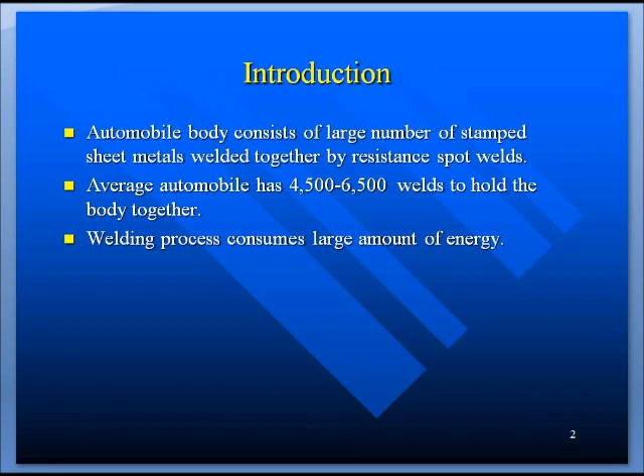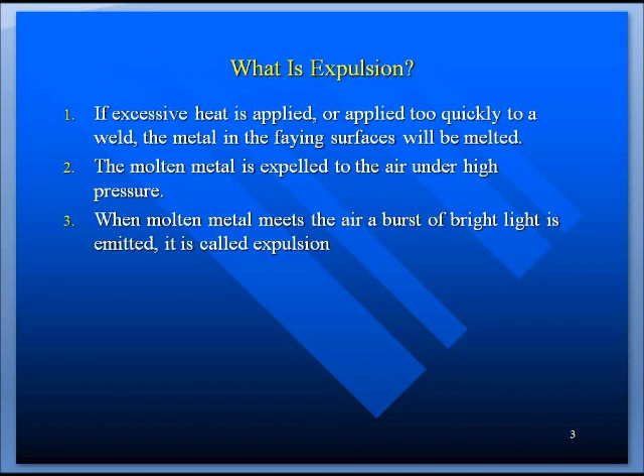What is expulsion? If excessive heat is applied or applied too quickly to a weld, the metal in the faying surfaces will be melted. The molten metal is expelled to the air under high pressure. When molten metal meets the air, a burst of bright light is emitted. It is called expulsion.

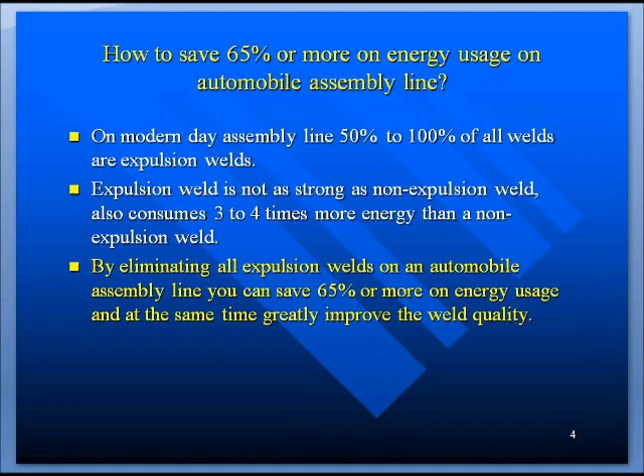On a modern day assembly line, 50% to 100% of all welds are expulsion welds. Expulsion welds are not as strong as non-expulsion welds, and also consume 3 to 4 times more energy than a non-expulsion weld. By eliminating all expulsion welds on the automobile assembly line, you can easily save 65% or more on energy usage, and at the same time greatly improve weld quality.

Fact or fiction? No spark, no weld. A stuck weld or missing weld does not produce expulsion. A good weld also does not produce expulsion.

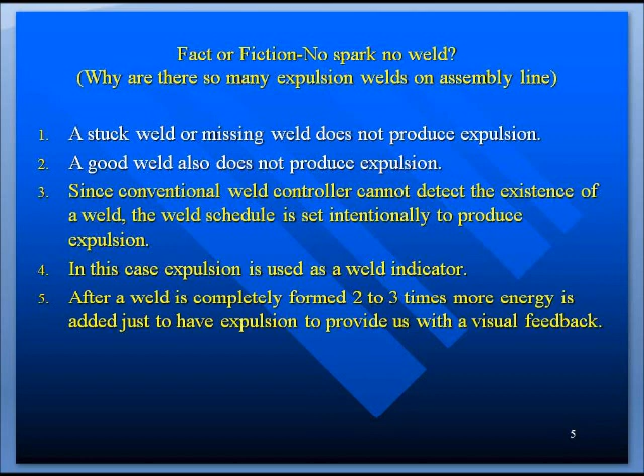Since a conventional weld controller cannot detect the existence of a weld, the weld schedule is set intentionally to produce expulsion. In this case, expulsion is used as a weld indicator. After a weld is completely formed, 2 to 3 times more energy is added just to have expulsion to provide us with visual feedback.

This is a Camry hybrid plant in Melbourne, Australia.

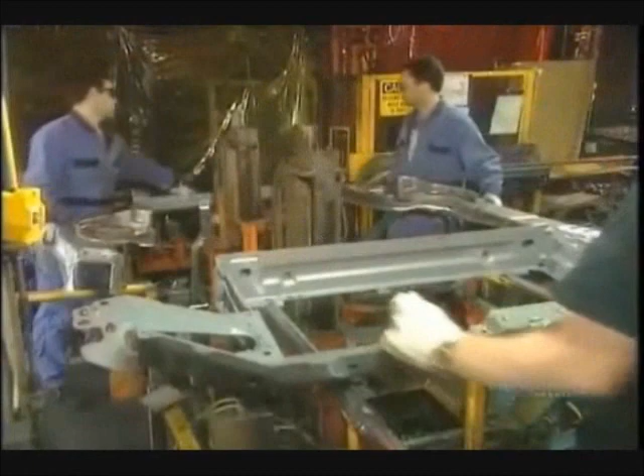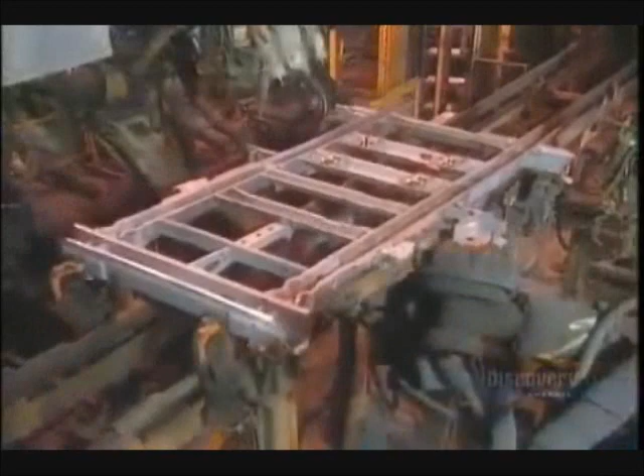This is a minivan plant in the U.S. Structure of the van: it's made up of the radiator support, two side rails, and clips on the front of those side rails for the bumper structure. Then they put this front structure onto the automated production line. Meanwhile, robots weld what's known as the ladder assembly. It's the backbone that supports the floor and sides of the van, and it contains, among other things, the pockets that will hold the seats.

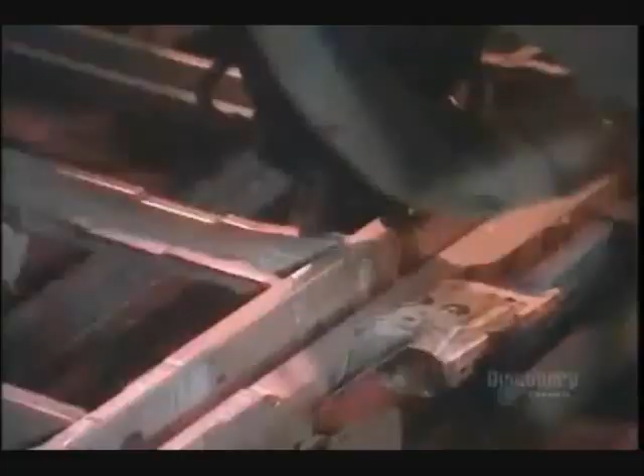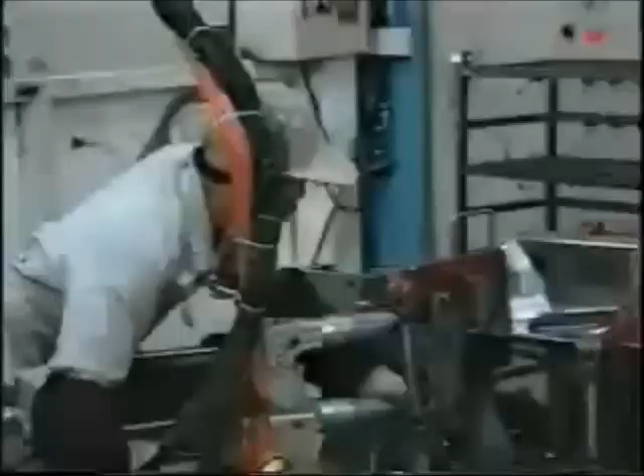This is a manual assembly line in Asia.

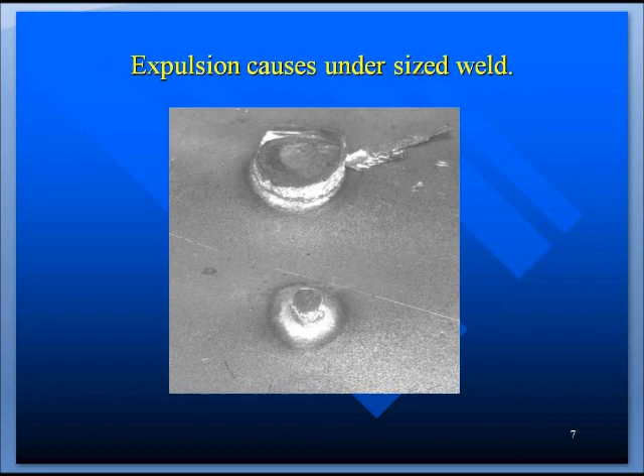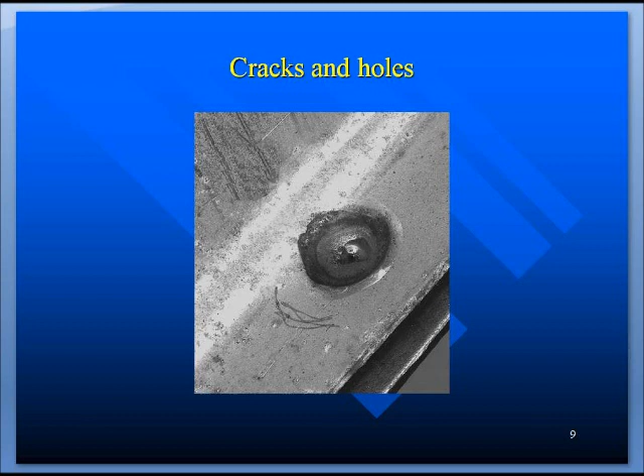Severe expulsion can cause porosity and void, undersized weld, expulsion burns through weld, cracks and holes, excessive indentation, and non-round weld.

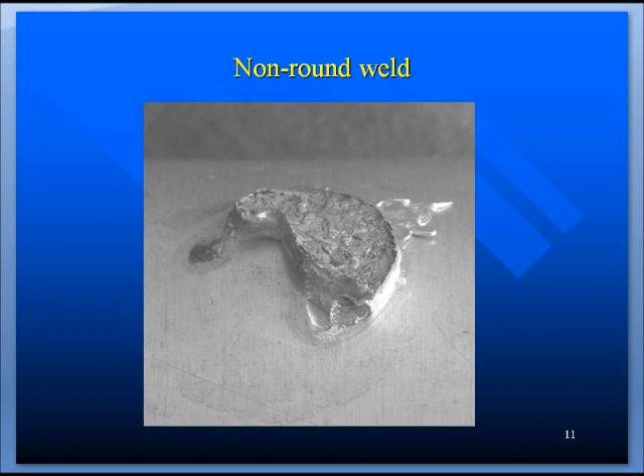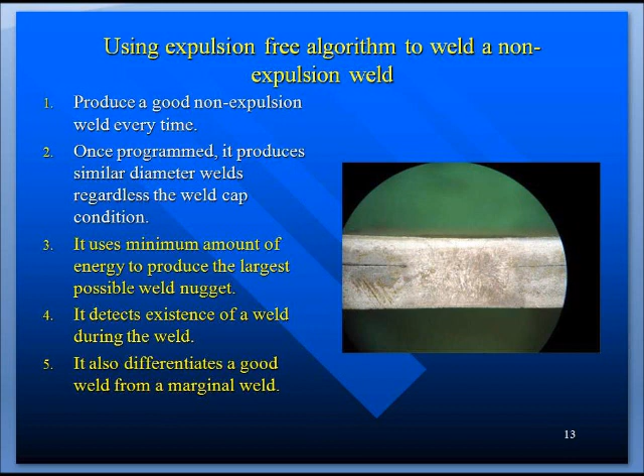Using an expulsion-free algorithm to weld a non-expulsion weld: number 1, produce a good non-expulsion weld every single time. Number 2, once programmed, it produces similar diameter welds regardless of the weld cap condition. Number 3, it uses minimal amount of energy to produce the largest possible weld nugget. Number 4, it detects the existence of a weld during the weld. Number 5, it also differentiates a good weld from a marginal weld.

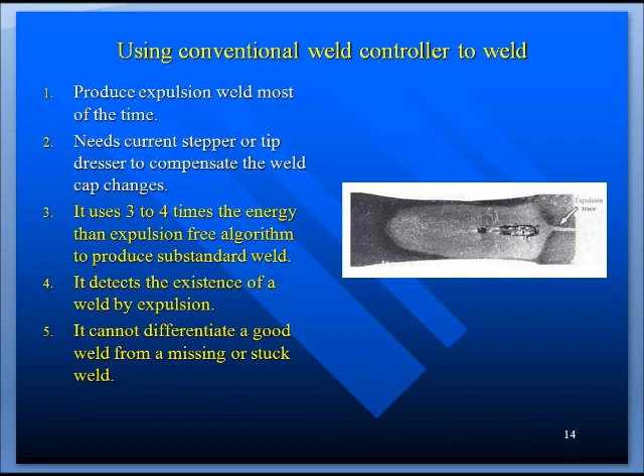If you use a conventional weld controller to weld: number 1, it produces expulsion welds most of the time. Number 2, it needs a current stepper or tip dresser to compensate for weld cap changes. Number 3, it uses 3 to 4 times the energy compared to the expulsion-free algorithm to produce a substandard weld. Number 4, it detects the existence of a weld by expulsion. Number 5, it cannot differentiate a good weld from a missing or stuck weld.

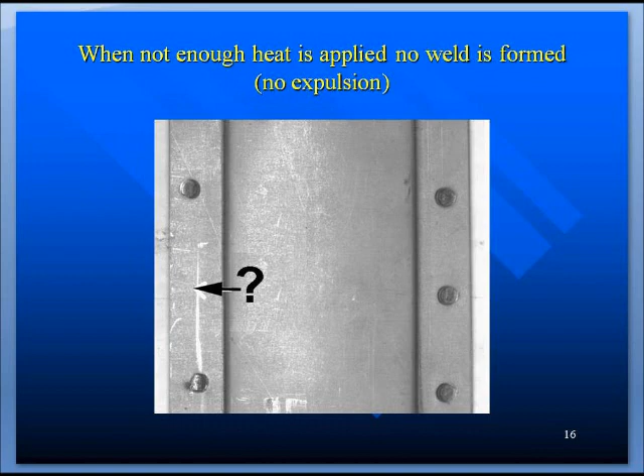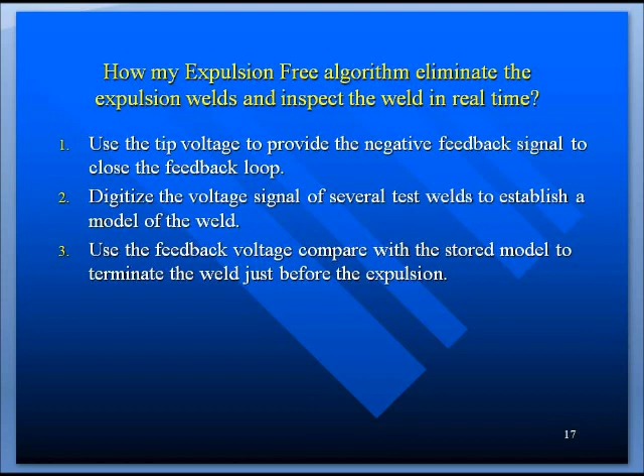How my expulsion-free algorithm eliminates the expulsion weld and inspects the weld in real time: number 1, use the tip voltage to provide the negative feedback signal to close the feedback loop. Number 2, digitize the voltage signal of several test welds to establish a model of the weld. Number 3, use the feedback voltage compared with the stored model to terminate the weld just before the expulsion.

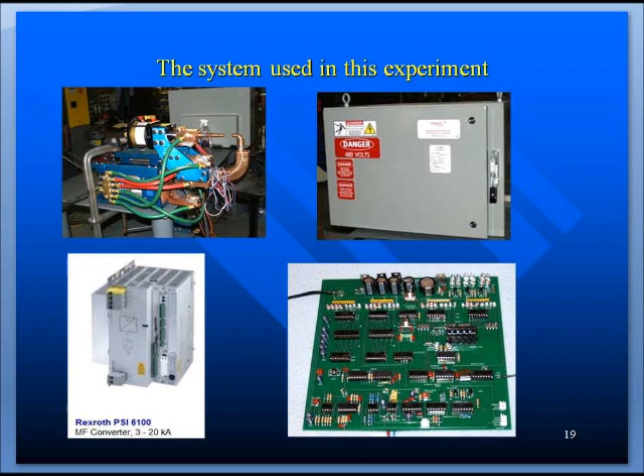An experiment was performed with the expulsion-free algorithm to verify the repeatability of the nugget size. Among them, 60 welds are real welds and 5,800 welds are simulated welds, with 9.5 kiloampere and 170 milliseconds. The average diameter is 5.78 millimeters with a 6.5 millimeter B cap.

Pictures on the last slide show the 3 coupons welded with this intelligent welder. Coupon number 1 has 3 welds with diameter of 5.85 millimeter, 5.83, and 5.84. Coupon number 10: 5.90, 5.88, and 5.62. Coupon number 19, which is the last coupon: 5.75, 5.79, 5.52. There are 1,300 welds between coupon number 1 and coupon number 10, and 4,900 welds between coupon number 1 and coupon number 19.

The largest deviation from the mean is minus 4.42% to plus 2.15%.

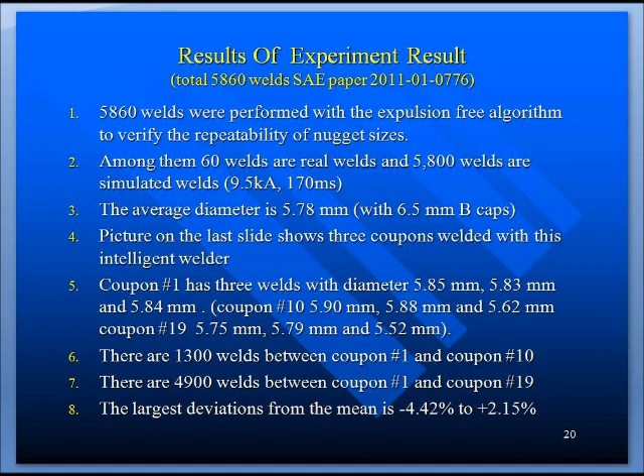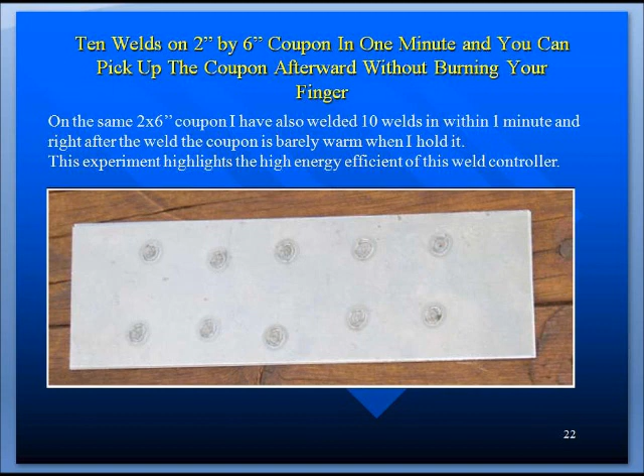On a 2 by 6 inch coupon, I can have 10 welds placed as fast as possible, and after the weld, the coupon is barely warm when I hold it. This experiment highlights the high energy efficiency of the weld controller. It did not waste any heat to heat up the coupon after the weld is finished.

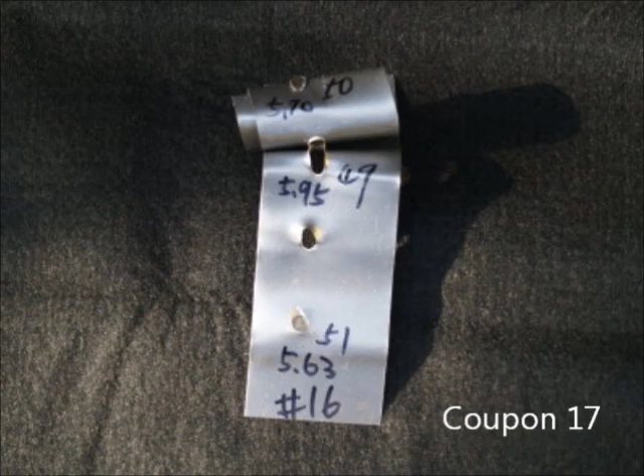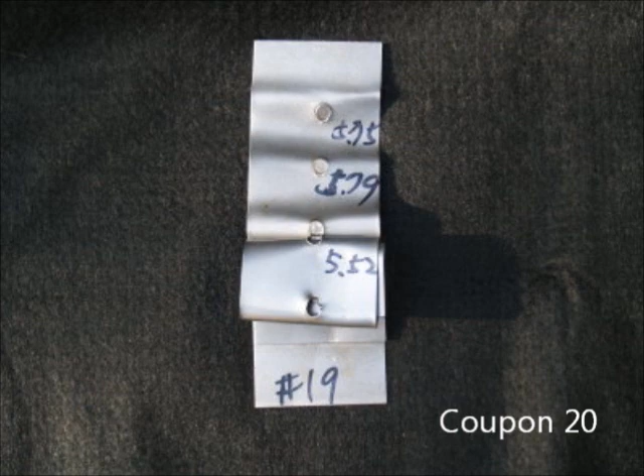This expulsion-free weld controller is also a real-time monitor. Since we don't weld with expulsion anymore, a white LED lamp turns on to indicate a weld has been started. A green LED lamp turns on after the weld to indicate a good weld has been produced. A red LED turns on and stays on after a weld to indicate that an open loop weld is produced.

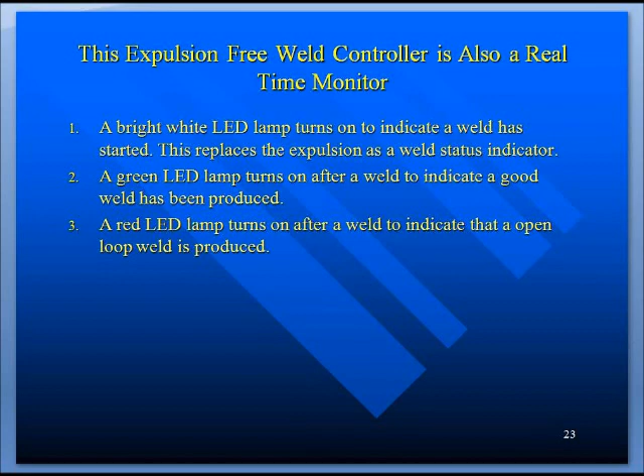How much energy can we save if everybody uses this expulsion-free welder? With some experimentation done several years ago and some of my own experimentation, the conclusion is the energy saving per car is approximately estimated at 17.43 kilowatt hours.

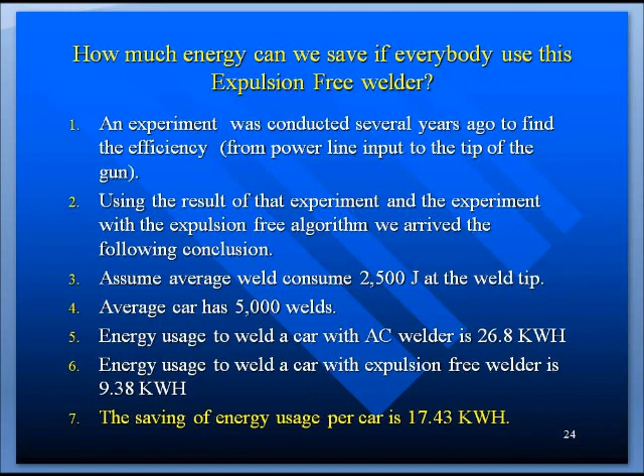Continuing from the previous slide: if the energy cost is 5 cents per kilowatt hour, the energy saving using an intelligent welder such as this can save about 87 cents per car. In 2009, there were 51,971,328 cars made in the whole world. Total energy saving if everybody uses this way to weld is 905 million kilowatt hours.

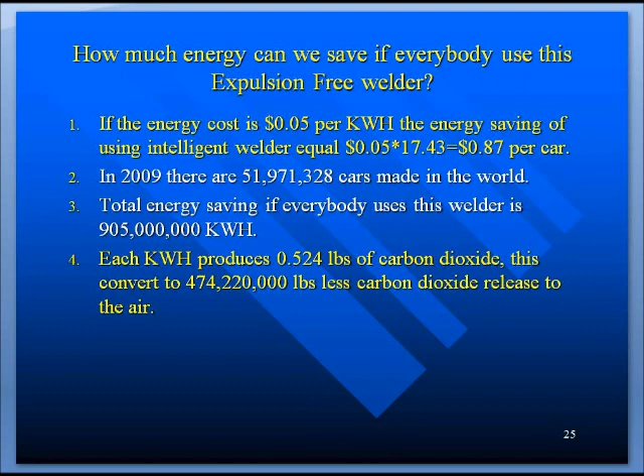Each kilowatt hour produces 0.524 pounds of carbon dioxide. This converts to 474 million pounds less carbon dioxide released into the air.

If you're interested to see a demonstration or want more information, please contact us, Calvin Shi and John Pippin Jr. Thank you.